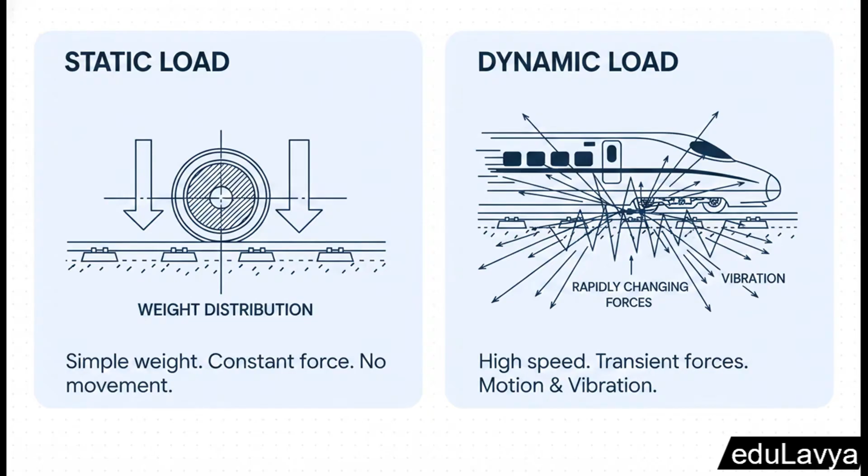Simple. But for high-speed rail, that classical static assumption is completely inadequate because the train is moving so incredibly fast. The structures below it don't just hold weight. They have to react to violent, rapidly changing forces over fractions of a second. This requires what we call transient dynamic analysis. Engineers literally have to simulate actual train loads moving at high speeds to see exactly how the tracks and structures are going to vibrate, bend, and recover in real time.

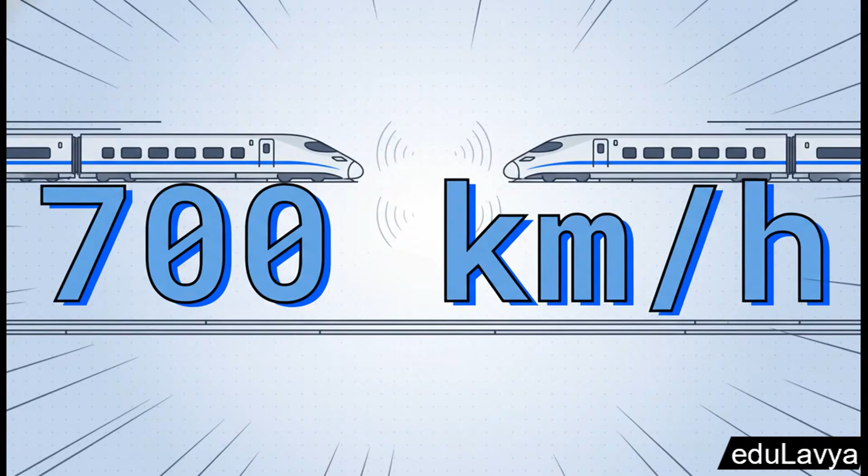Moving on to Section 2, managing aerodynamic pressure bursts. Let's take our journey out onto the open track to see these extreme forces in action. Picture this. You're sitting in a train, cruising along at 350 kilometers per hour. Suddenly, a train going the exact same speed blows past you in the opposite direction.

From a physics perspective, those two massive objects are tearing past each other with a combined speed difference of 700 kilometers per hour. 700. That is almost the cruising speed of a commercial airliner, and it's happening just meters away, right on the ground. And that 700 kilometer per hour passing speed creates a massive aerodynamic threat.

As the trains meet, there's an immediate, violent burst of air pressure, which is instantly followed by a severe pressure drop slipping right between the passing carriages. Now, while this isn't quite enough to actually blow the trains off the tracks, thankfully, this violent push and pull severely stresses the sides of the cars. Without proper infrastructure planning, this repeated stress can cause the window glass to undergo severe fatigue and literally break mid-journey. No way we want that.

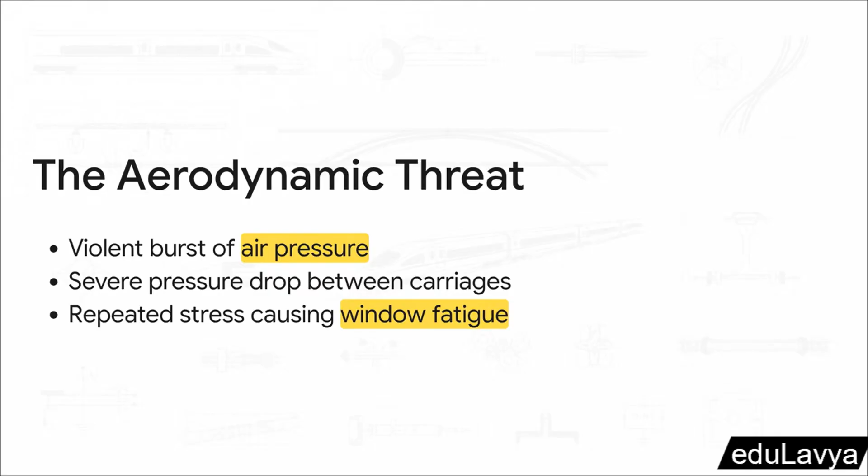So how do civil engineers actually solve an invisible air pressure problem? Well, they physically widen the railway. Looking at the formation width and spacing requirements for these transverse sections, you'll see that to manage these aerodynamic pressure bursts safely, high-speed tracks must be spaced significantly further apart than standard railways.

It's a really costly requirement. We're talking wider land acquisition and much broader embankments, but it is absolutely critical. You have to dissipate that violent airburst before it hits the passenger windows.

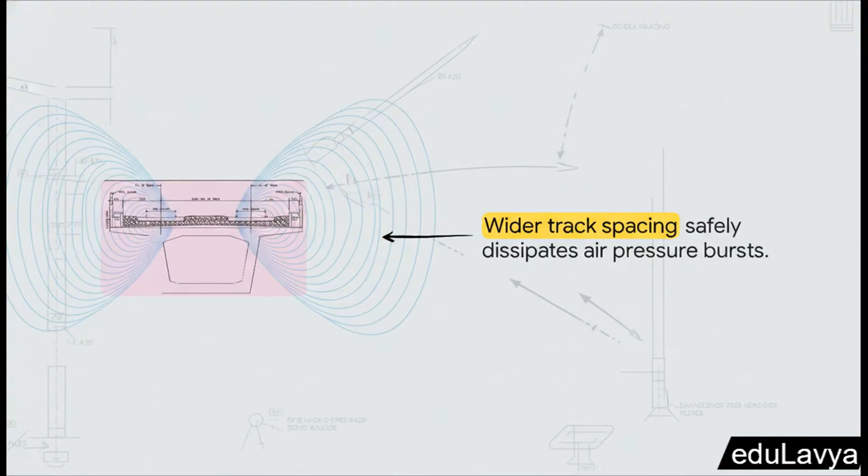Okay, Section 3, conquering tunnel shockwaves. Now, if open tracks present aerodynamic challenges, enclosed spaces kind of turn them into nightmares. Just think about this for a second. What actually happens to the air when a massive, solid object plunges into a narrow, enclosed tube at 350 kilometers per hour? Well, the air has absolutely nowhere to go. It can't easily slip around the sides. Instead, it gets violently compressed.

And this creates a pretty terrifying phenomenon known as micro-pressure waves. When the high-speed train enters the tunnel, it generates a pulsed compression wave that shoots through the tunnel at the speed of sound. And here's the crazy part. The pressure gradient of this wave isn't just proportional to the train's speed, it's actually related to the cubic speed of the train. That means even a tiny increase in speed creates a massive exponential leap in pressure.

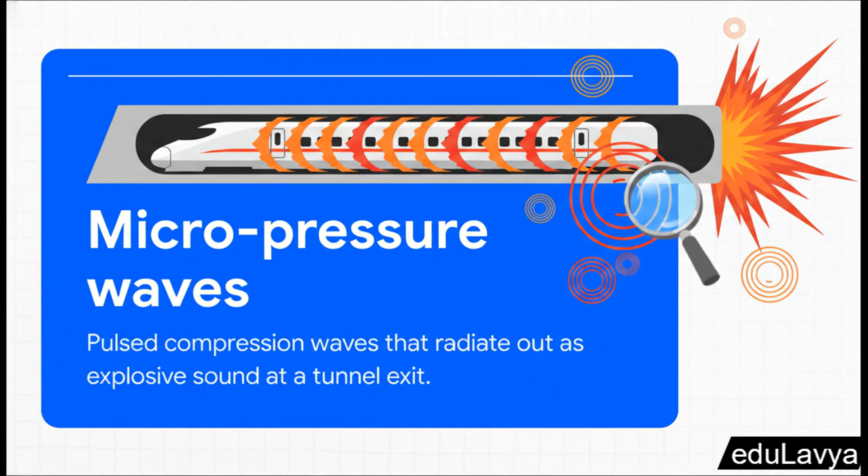When this wave finally reaches the exit portal, it radiates out as a literal explosive sound, often called a tunnel boom, and it causes heavy, really alarming vibrations on the train's doors.

This is exactly where we see structural and vehicular solutions having to work perfectly in tandem. To mitigate these explosive shockwaves, engineers have to build massively increased cross-sectional areas for the tunnels. They often even opt for independent, single-track tunnels just to avoid the compounding aerodynamic drag of two trains passing underground. They also construct these specially designed tunnel hoods at the entrances. These act like giant buffers and are actually up to 1.5 times the diameter of the tunnel itself. Plus, they install vertical pressure release shafts.

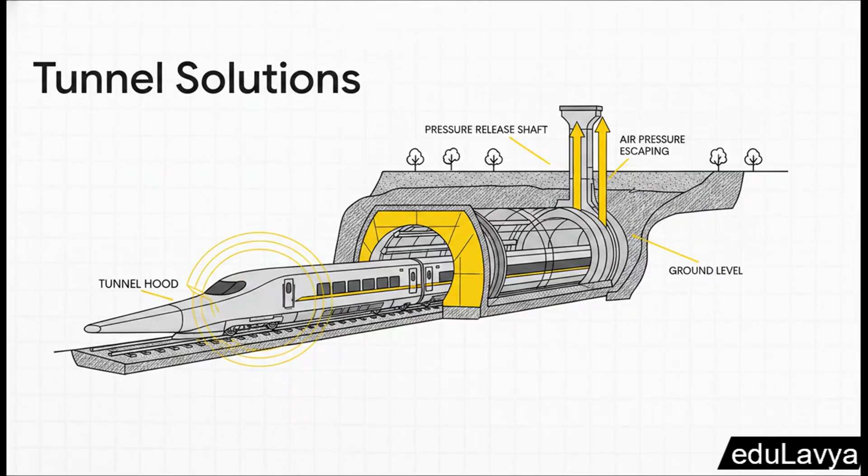And on the vehicle side, this is exactly why Japan developed trains like the Fastech 360 with ultra-long 16-meter streamlined noses. They're shaped using complex 3D fluid dynamic analysis just to slice into that air smoothly. But even with all those brilliant solutions, incredibly strict safety limits still remain. Infrastructure specifications state that tunnels must be designed so that the maximum pressure variation along a standard high-speed train doesn't exceed 10 kilopascals at maximum speed.

Now, why exactly 10 kilopascals? Because that is the absolute biological limit required to protect the eardrums of the passengers, just in case the train's own internal sealing system happens to fail while it's inside the tunnel. That brings us to Section 4, Bridge Resonance and Stability.

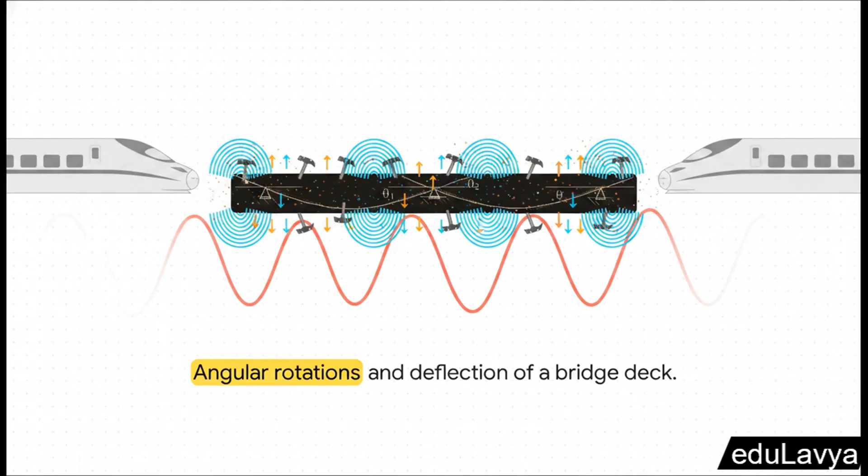Bringing our journey out of the dark tunnels and up onto a soaring long-span bridge, the physics challenge completely shifts. When you look at the angular rotations and dynamic deflections of a bridge deck under load, you realize high-speed trains aren't just heavy. Their weight is distributed across perfectly spaced bogies or wheelsets. When a train crosses a bridge at hundreds of kilometers per hour, the regular, repeated pounding of these bogies hitting the spans at exactly the right speed can actually trigger dangerous resonance. It's kind of like pushing someone on a swing at the exact perfect moment. This resonance causes massive amplifications in the bridge deck's vertical deflections.

And if that bridge resonance isn't perfectly managed by the transient dynamic analysis we talked about earlier, something truly terrifying happens. If the bridge deck's upward and downward acceleration becomes too extreme, the crushed stones beneath the track, which we call the ballast, actually lose their cohesion. Because of the intense high-frequency vibration, those solid rocks literally begin to behave like a liquid.

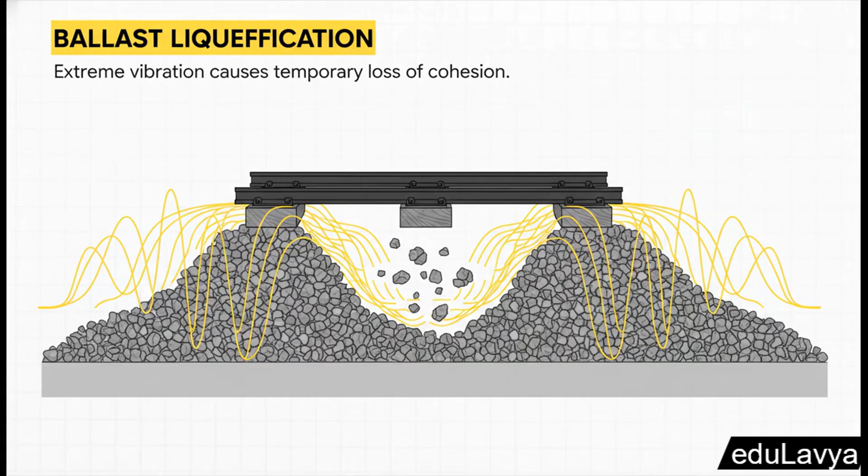And as you can probably guess, your track turning into soup is definitely not ideal when a train is rocketing over at a top speed. It instantly destroys the stability of the long welded rails bolted above it, leading to a complete catastrophic loss of track geometry. Finally, let's look at Section 5, the passenger comfort equation.

So we've talked about pressure bursts, shock waves, and liquefying track ballast. But all of these extreme structural limits ultimately connect back to the person sitting in seat 14B. To ensure a high-speed train doesn't violently sway and cause passenger discomfort, the infrastructure is subjected to incredibly strict serviceability criteria, specifically for how much a bridge deck is allowed to twist under load. For slower speeds under 120 kilometers per hour, a maximum twist of 4.5 millimeters over a 3-meter gauge is allowed. But the second you push that speed higher, the limit tightens strictly to a microscopic 3 millimeters.

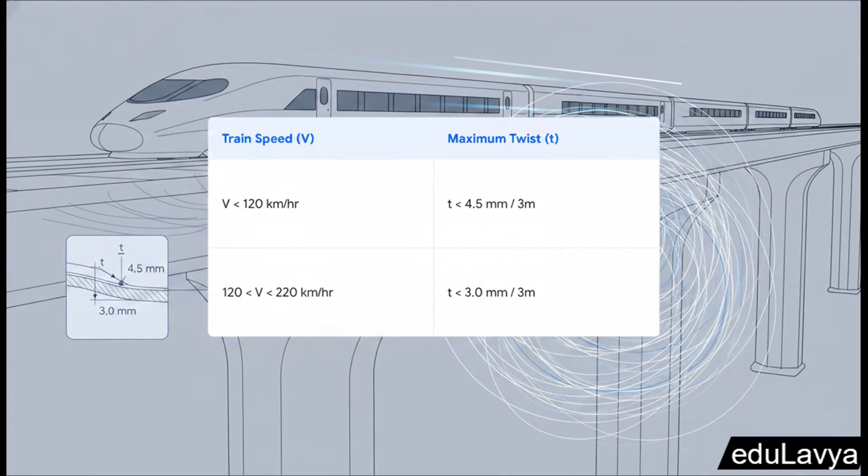Just try to imagine engineering a massive concrete bridge span and demanding it twist no more than the thickness of a few sheets of cardboard while a multi-ton train slams into it. So, the crucial point here is that all of this massive civil engineering ultimately serves a very human biological limit. The ultimate goal is to keep the vertical acceleration experienced by the passenger as low as possible. To achieve a ride that's classified as very good, meaning it's perfectly smooth and you definitely won't feel nauseated, engineers must ensure the vertical acceleration of the train carriage never, ever exceeds 1.0 meters per second squared. That requires the track, the bridges, the tunnels, and the train itself to operate in absolute perfect physical harmony.

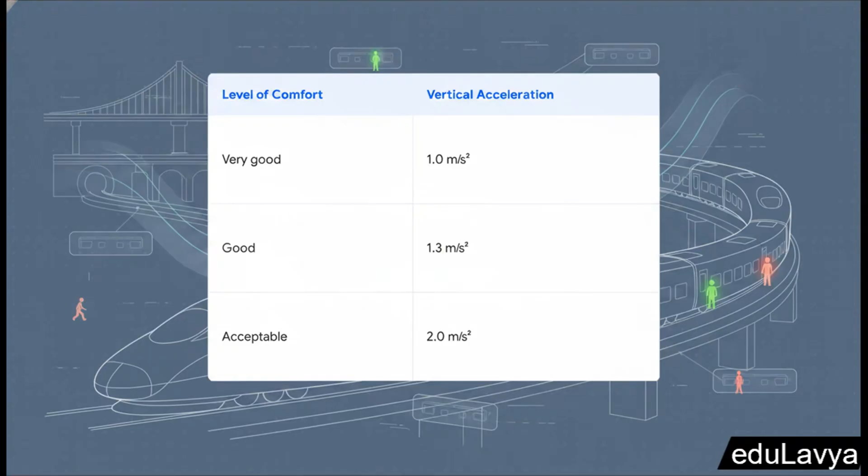From widening tracks to stop aerodynamic glass-shattering pressure bursts, to tunneling massive relief shafts to prevent sonic booms, to managing bridge resonance so the very ground doesn't liquefy beneath the wheels, high-speed rail is an absolute marvel of extreme civil engineering. So, the next time you're gliding effortlessly across the countryside at 350 kilometers per hour, comfortably sipping a coffee, will you ever look out that train window the same way again, knowing the invisible physics and massive infrastructural forces working furiously right beneath your feet to keep you safe?